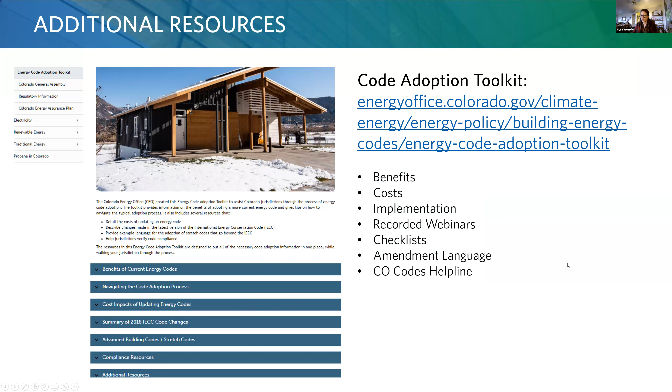Today I want to highlight the Code Helpline. This helpline is available to anyone in Colorado on any of the I-codes or REACH codes. So for example, if you are a jurisdiction and need assistance on a plan review, or a homeowner or engineer with a question about code applicability, you can submit a ticket and a subject matter expert will get back to you in a couple days. You can access this helpline through the Code Adoption Toolkit or through this link.

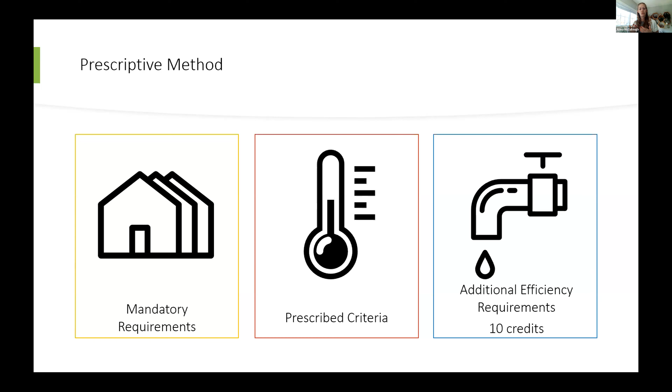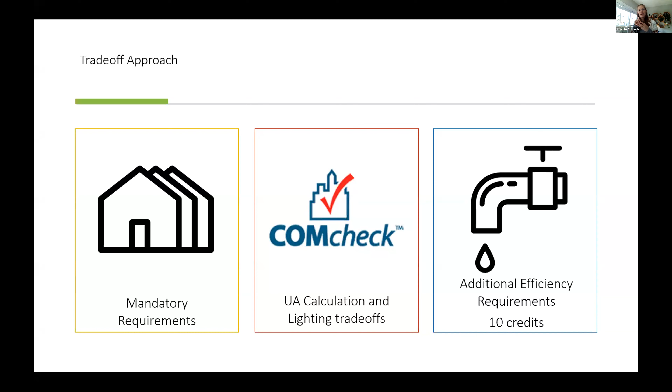If we think more about the trade-off approach, which is what we have in COMcheck, it allows for some trading off within the envelope or the lighting so there's a little bit more design flexibility. When reviewing for a trade-off approach, which is what we see most often, we're looking for a ComCheck on envelope, lighting, and then mechanical and plumbing all in one ComCheck. We expect to see that they all have that green passes bar.

Within COMcheck, the program is calculating the total UA of the building, which is the sum of the U factor of all of the assemblies - the glazing, the roof, the walls, the foundation, any floors above grade - multiplied by their assembly areas. If each of those is less than or equal to zero, it will pass the ComCheck.

So you'll see in some buildings that the prescriptive level of insulation provided in one small area of the walls might not meet the prescriptive insulation listed in the code. The way the design team is getting away with that is by using the trade-off approach calculation that ComCheck does for them. Within lighting as well, we're looking for the total lighting power used in the building to be less than the lighting power used in the baseline prescribed by the code. So ComCheck also allows for some trade-off between lighting power densities in spaces.

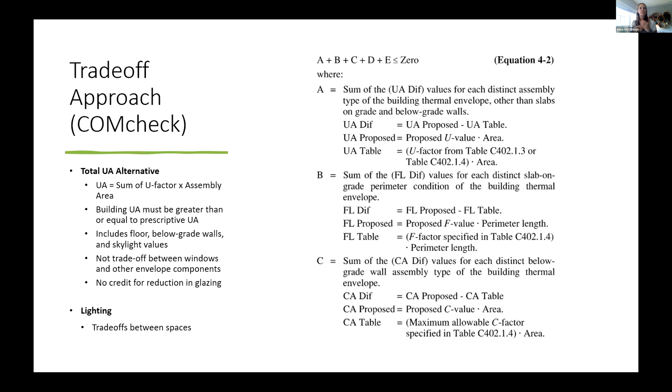Along with those mandatory requirements, in ComCheck we're also looking for the additional efficiency package. In the 2018 IECC, we had 6 options and the design team picked one - it was almost always reduced lighting power density - and selected that in ComCheck. You wanted to make sure ComCheck reflected the same efficiency package across all 3 ComChecks, so your architect, your lighting designer, and your HVAC plumbing designer were all selecting the same efficiency package. And we just moved on, right? Things got a little bit more difficult in the 2021 IECC.

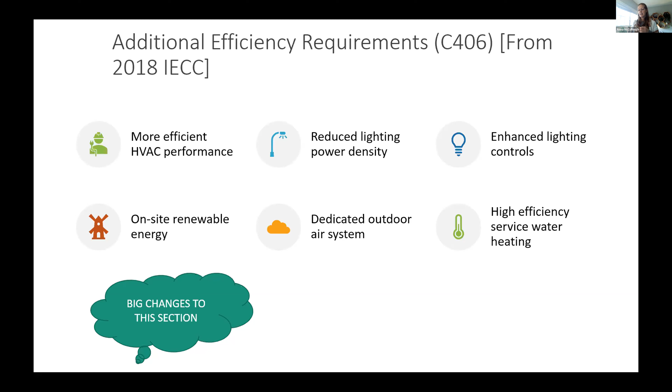In the 2021 IECC, we now have to show 10 credits under Section C406. What that means is there's essentially a menu of options that design teams can mix and match based on their occupancy type in the building to come up with 10 credits.

I also wanted to point out that if we have a tenant space, they only have to receive a minimum of 5 credits from these tables. There are some exceptions based on the base compliance of the total building when it complied with code. If they have the reduced air infiltration, C406.9 for example, your tenant that you're reviewing is not going to need to show 5 credits - they're already compliant with the additional efficiency requirements.

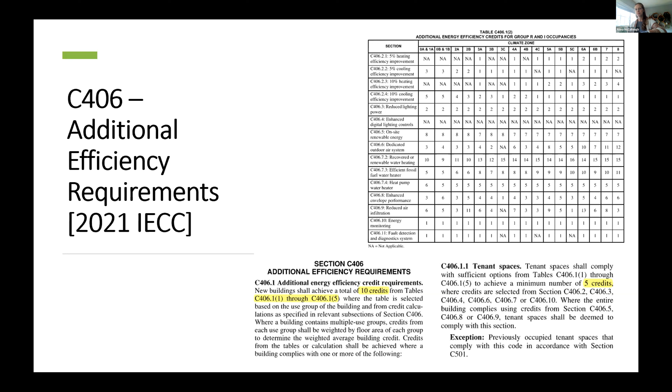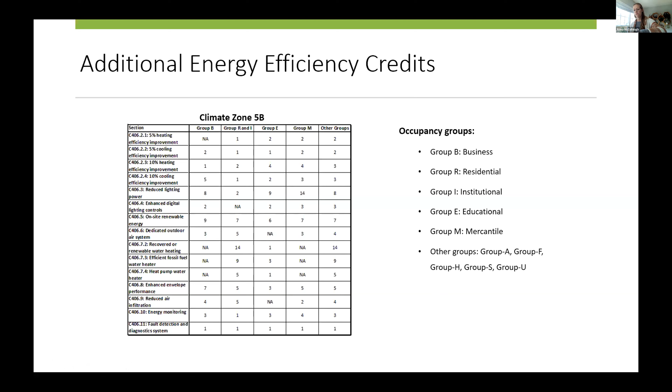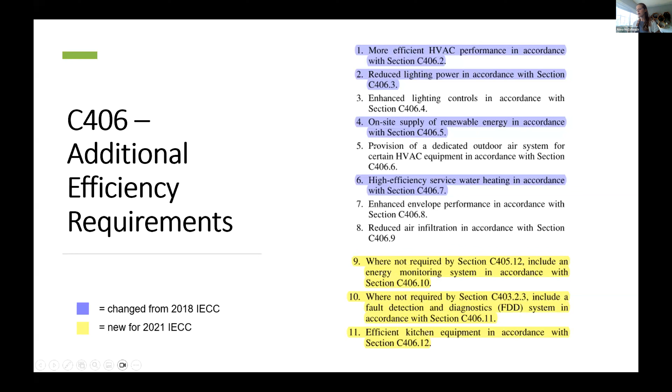There have been, like I said, some changes from the 2018 to the 2021 IECC. We've highlighted in purple each section that has had updates from the 2018 IECC to the 2021, and we have 3 additional efficiency options that are new for the 2021 IECC. We'll go quickly through these just to give you guys an idea of the efficiency packages that we're expecting to review for, and where the efficiency is going to come from in the performance model pathway.

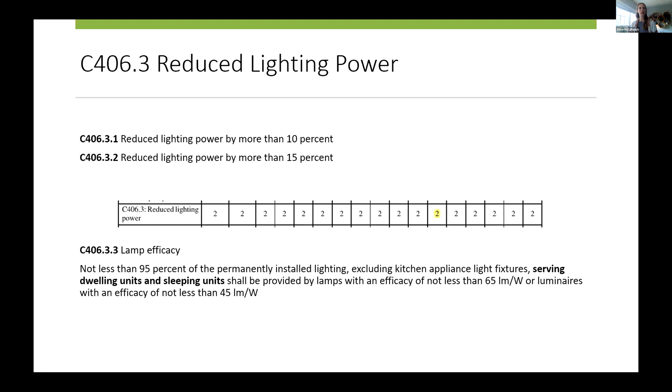The first energy efficiency package is reduced lighting power. Low points available on this one because it's easy to meet, and we want to encourage design teams to do more than just reduce their lighting power. We have quite a few points available for on-site renewable energy. The code sets a standard for the amount of on-site renewable energy required to receive these points, and there are increased credits based on the amount of PV provided - there's a calculation that will give them the number of credits.

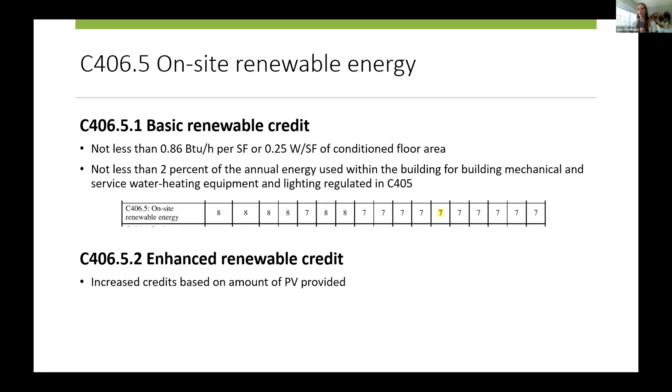Service water heating.

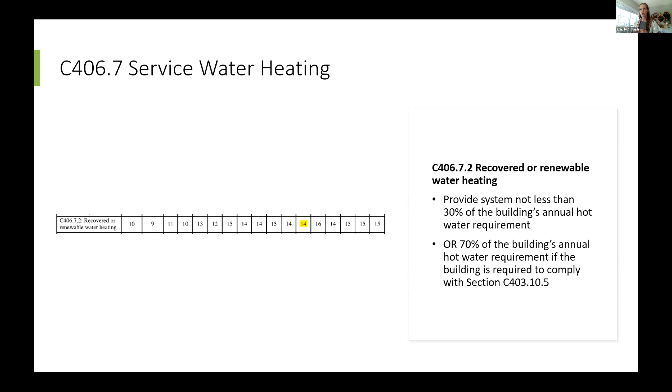In section C406.7, the first credit option is recovered or renewable water heating. This is really hard to achieve. What's required is providing a renewable water heating system that is not less than 30% of the building's domestic hot water use, or 70% of the building's annual hot water requirement if the building is required to comply with another section. This is really hard to achieve - it's going to be heat recovery from wastewater, or solar water heating on the roof. Very high first cost, weighted very heavily.

If we provide a condensing water heater, points are available. This is for climate zone 5B. Heat pump water heaters are weighted slightly less.

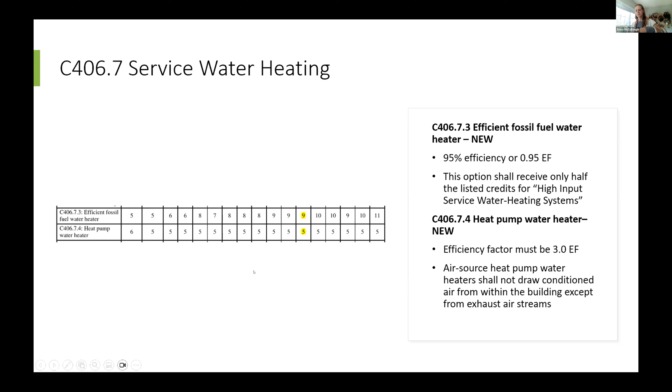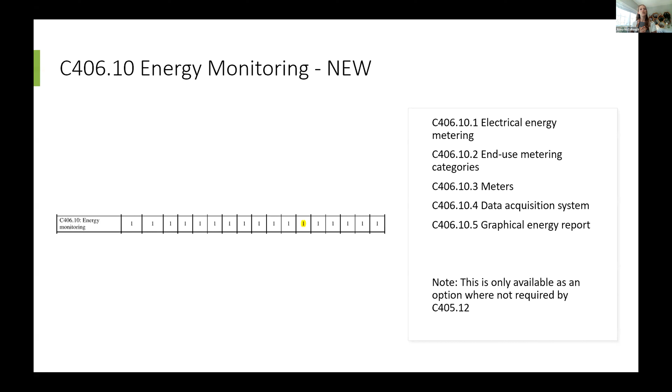Energy monitoring: if the building is not required to have energy monitoring and energy monitoring is provided, 1 point is available. There are requirements around what that energy monitoring system has to provide. These requirements are all listed within section C406, and they match the requirements in section C405.12, where energy monitoring is required.

Fault detection and diagnostics is a new credit available. If you are providing a fault detection and diagnostic system on your HVAC system and it is supplied above what is required - supplied when it's not already required by code - sorry, there's a double negative in there - then you could receive 1 point for that. There are requirements around what that fault detection and diagnostic system has to do to receive this credit.

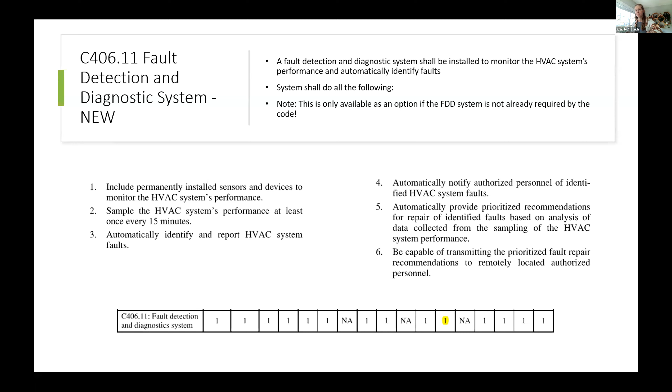I know I kind of blew through the prescriptive and ComCheck approach, but I really wanted to talk a little bit about what energy efficiency measures are required in the proposed, so we can talk more about why the performance method is the way that it is. Any questions on the prescriptive or ComCheck method so far?

Feel free to interrupt me if you have a question, or if you want me to go back and talk a little bit more about something - I'm happy to do that.

So when we're talking about the performance method, there was a change between 2018 and 2021. In the 2018 IECC, you were only required to have 15% annual energy cost savings. In the 2021 IECC, we have to have 20% annual energy cost savings. We'll talk more about what that means and what we're comparing against, but just to give you an idea, we are requiring an additional level of energy efficiency with the 2021 IECC.

These buildings are still required to comply with all of the mandatory requirements in the code - things like fault detection and diagnostics on outdoor air economizers, lighting controls, things like air barriers. I could go on. There is a whole chart in section C407 of the 2021 IECC that gives you a full picture of each mandatory requirement and where it is in the code. It's a very useful chart.

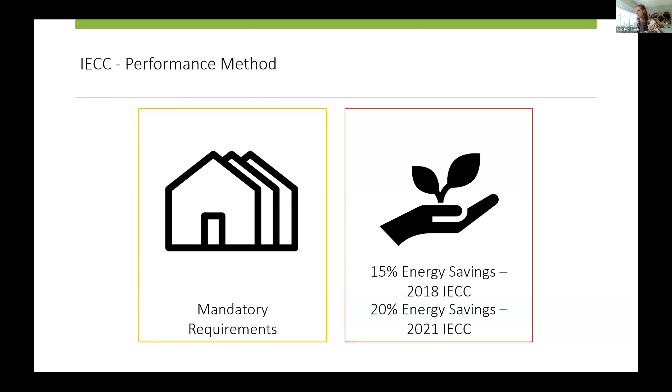So what all is required in section C407? Again, only those mandatory requirements are required - prescriptive requirements do not need to be met. There is required to be a whole building annual hourly energy model. We're not just looking at loads, not looking at an output from an HVAC engineer's load sizing program. We are looking for a whole building annual hourly energy model, which means the program the energy modeler uses has an hourly weather file that models the energy use of the building for every hour of the year based on its location.

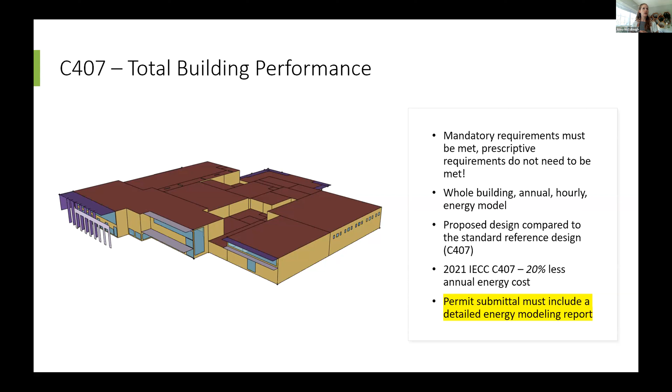The proposed design is going to be compared to the standard reference design. We'll talk more about what the standard reference design is, but that's what we're going to call the baseline. Again, in the 2021 IECC, we have to show 20% less annual energy costs than the standard reference design. Our permit submittal must include a detailed energy modeling report. We'll go through an example of what one looks like, at least from my company.

So when do we see buildings using this method? Number one, if they are very large, typically they're using the performance method. We're seeing more and more clients come to us looking for an energy model solely because ComCheck and Section C406 have become much harder to show compliance with.

If their glazing area, or window to wall ratio, is greater than 40%, they have to comply via Section C407. Prescriptively in the code, you cannot have a window to wall ratio greater than 40% if you are using daylighting controls. And if you are not providing daylighting controls, you cannot have a window to wall ratio greater than 30%. So that's really important when we're reviewing, to make sure their window to wall ratio has been reflected accurately in their ComCheck. If you look at the drawings and it's a building that looks like this, we'd be a little suspect if they said their window to wall ratio is 40%.

Other times we see design teams want to use Section C407. They're looking to trade off between their envelope efficiency and lighting and HVAC efficiency. A good example would be a metal framed building that doesn't want to provide continuous insulation. We can probably model them out of providing continuous insulation — we would never recommend that — but it is a way to get out of providing some of the things prescribed in the code.

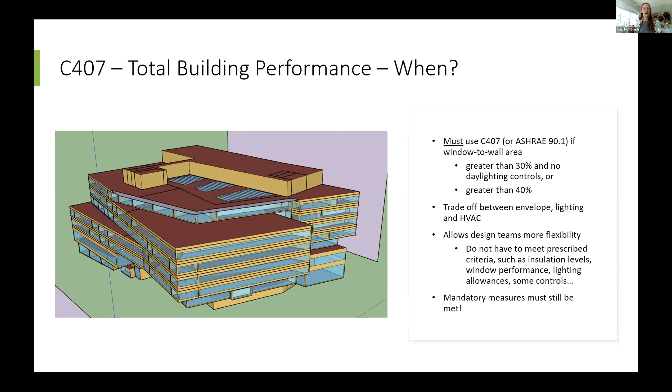And this is a common theme across all of my slides: the mandatory measures must still be met. If it's mandatory in the code, you still have to show compliance with it. When we're reviewing for that, we want to see a full list of those mandatory measures and where they are located in the drawings. You guys don't need to come up with a list of the mandatory measures.

So, any questions so far on when we would use Section C407, or what we're reviewing for when we first look for that compliance?

Great, okay, so additional compliance requirements. Utility rates have to be identical between the standard reference design, or the baseline, and the proposed. They can be from the Department of Energy, the EIA, or local utility rates. The code does not dictate which utility rates you have to use — you just have to use the same ones.

Oftentimes, when we're looking at outputs from the energy model, we don't see that utility rates per kilowatt hour are completely identical. The reason for that is you're looking at a blended rate — the cost per kW combined with the peak energy use cost combined with the kilowatt hour energy use cost creates what's called a blended rate. So there'll be a couple cents difference between the baseline and proposed, but we want to make sure we're using the same utility rate structure.

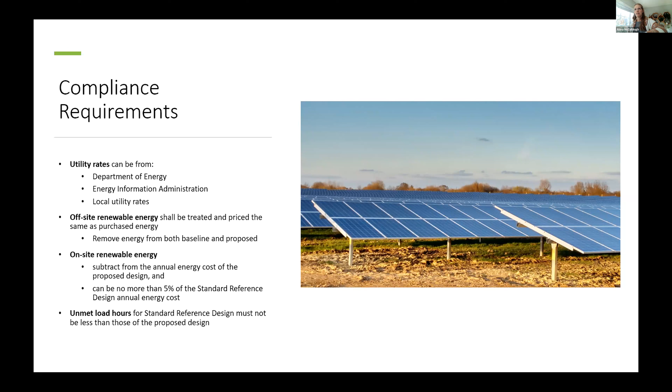Any questions on any of that? Great, my mouse is frozen.

Okay, so here's an example of a building performance letter that we submitted for. This is probably a 2021 example. I have the different sections highlighted in here. The mandatory provisions are shown in the red box. This is on a drawing sheet. Some jurisdictions like to see the compliance on a drawing sheet, some like to see it as an 8.5 by 11 appendix. We do both very frequently.

If it's on the sheet, it's a lot easier to find and gets missed much less often. So we have the mandatory measures located here, very clearly, with each mandatory measure listed and where it is located in the drawings.

We also want to review the baseline and proposed inputs to the energy model. We want to make sure that the standard reference design, or the baseline, was modeled correctly per section C407 - we'll get into that in a minute - and that the proposed was modeled per the drawings. The correct HVAC system is in there, the efficiencies are modeled correctly, lighting power densities, all of that.

If you're looking at a school, for example, and the lighting power density allowed in the baseline of the classroom is 0.60 watts per square foot, but then in your proposed design they're only modeling 0.02 watts per square foot, that should set off alarm bells. That's like one light in the middle of the classroom. So we want to make sure that the inputs are within the realm of possibility and accurate to what was designed.

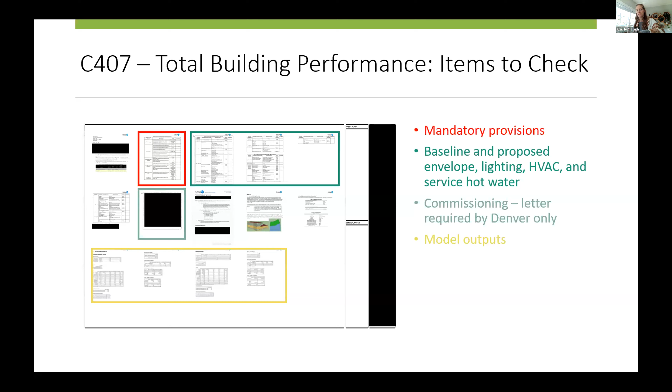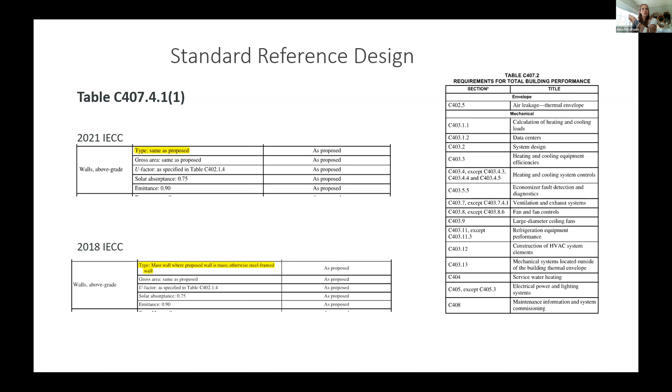The standard reference design, a little bit more about the envelope. All of the insulation and glazing meet the prescribed insulation levels and glazing U factors, as well as solar heat gain coefficient.

If you have greater than 40% window to wall ratio in your design, you can only have 40% as a maximum window to wall ratio in the standard reference design. We want to make sure they are taking a hit for providing so much glass above what is allowed to be included in the design prescriptively.

Skylights are only allowed to be 3% of the gross roof assembly in the standard reference design. And if there is shading, there is no shading modeled in the baseline.

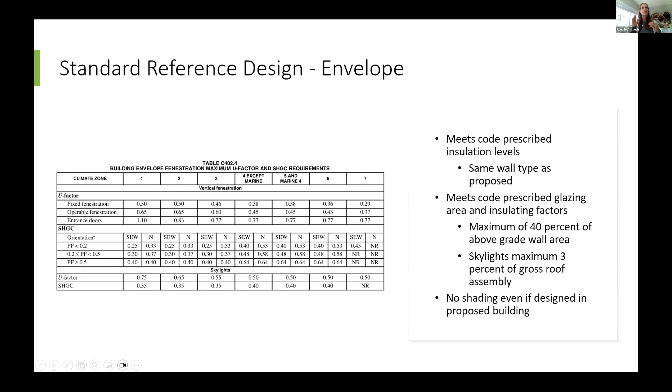Here's a good example of a window to wall ratio in the standard reference design versus the proposed. You'll see in the standard reference design that we have much less glazing shown to meet that maximum 40% window to wall ratio. And in the proposed, we're at probably closer to 60 to 70.

Sorry, my toddler is home and he broke into my office.

Much closer to a 60 to 70% window to wall ratio.

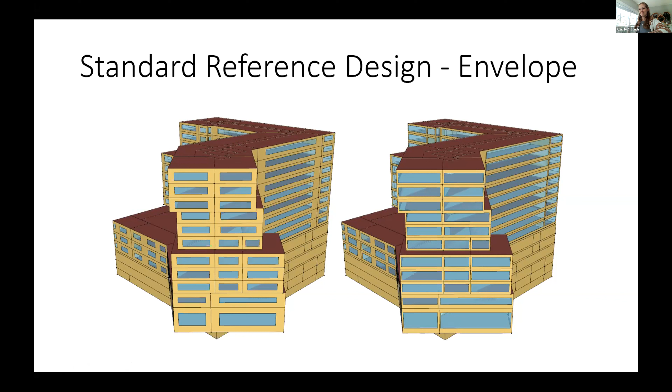In the standard reference design, we also would always expect to see code prescribed lighting levels. So all of the lighting power allowances are modeled per section C405.4.2, as well as daylighting.

Oftentimes daylighting will be required in the standard reference design, but the lighting power densities in the proposed model will be so low that daylighting doesn't need to be provided. So we want to make sure that lighting controls are called out accurately, so that daylighting and prescriptive requirements and lighting controls are modeled accurately in the standard reference design versus what may or may not be provided in the proposed based on their design.

A good note on this slide as well is that interior gains are the same between the standard reference design and the proposed. So if you're in an office, for example, you're modeling the same amount of office equipment in the baseline as the proposed.

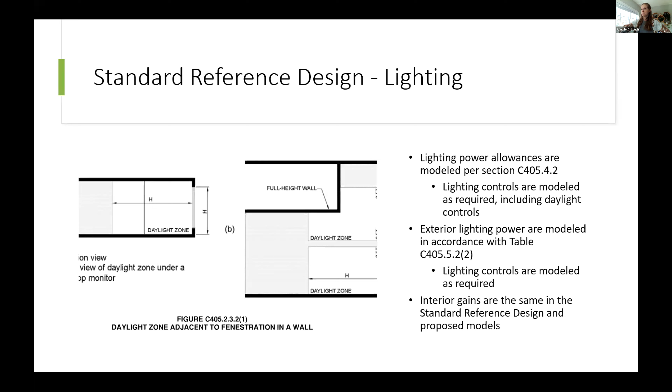Okay, so in the mechanical system, there are these two charts: C407.5.12, which is the HVAC systems map, and then C407.5.13, which is the specifications for these different system types. So your proposed system type tells you what your baseline system type will be, or your standard reference design system type.

We start off with your condenser cooling source. If you have a rooftop unit that's DX, a direct expansion rooftop unit, it's cooled by air. You're down here, where your condenser cooling source is air. Let me find my mouse, so sorry.

If we're still using our same example, a standard kind of rooftop unit with gas heat, and let's just say it's electric reheat, your heating system classification is going to be fossil fuel, right? We're an office, it's a VAV rooftop unit, so we're system 4. If we go to this chart, you'll see it's a packaged variable air volume with reheat, VAV, direct expansion cooling, and a hot water fossil fuel boiler is providing your heating.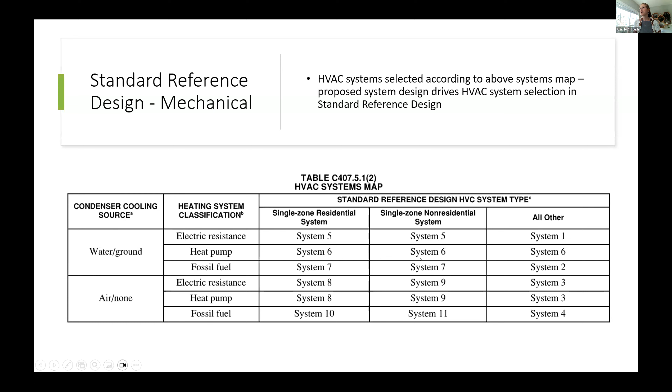So if we have a water source heat pump system, we know that our condenser is cooled via water, so we're in this upper half of the chart. And then we have a heat pump, a water source heat pump, so we know we're in this secondary system, or second row in the chart. And so then we know we're a system 6. So if we go back to this chart, you'll see that your system type is water source heat pump, constant volume, direct expansion, an electric heat pump, and then the boiler is providing the heating to the loop.

This can seem very overwhelming to try and work your way through this HVAC systems map. But for your typical system, what's going to raise a red flag for you is if the baseline system type or baseline heating system doesn't have the same fuel type as your proposed heating system. That's a good red flag for you to check.

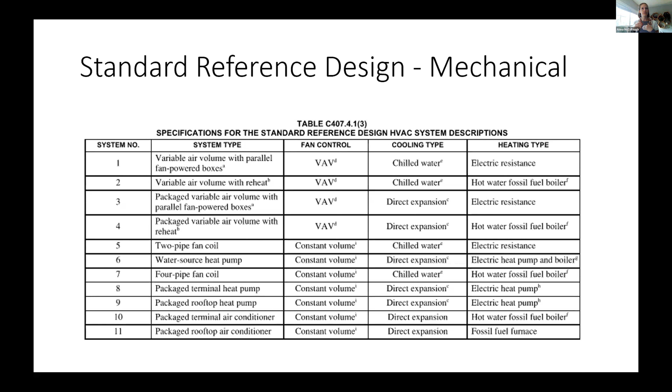The mechanical controls in the standard reference design must meet the mandatory and prescriptive requirements. A good example is that outdoor air economizers are prescriptive. If our proposed system is VRF with a DOAS, there's not going to be an outdoor air economizer unless our client has a ton of money and space for ductwork. But we could go through the HVAC systems map and find that our standard reference design system would be a VAV with parallel fan powered boxes, and in that case it would be required to have an economizer. So we want to make sure those prescriptive requirements are being modeled, and your energy modeler isn't taking credit or showing annual energy cost savings for something they shouldn't. Outdoor airflow, as a side note, has to be modeled identically between the baseline and proposed, so we want the same amount of outdoor air in the baseline as the proposed.

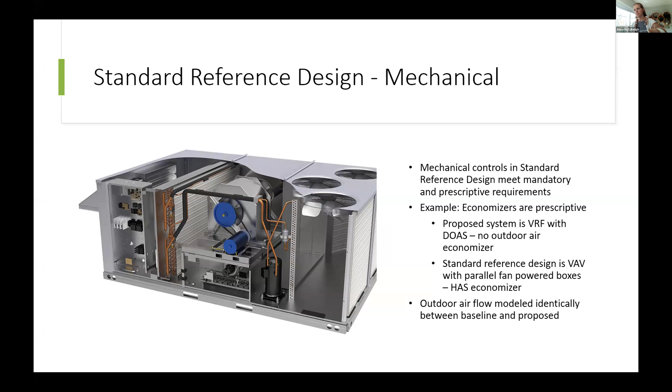Okay, that was a lot of information. Do you guys have any questions before we very quickly go over ASHRAE 90.1 2019 as our secondary compliance path?

What would be the best path for large additions that require existing building retrofits? It really depends. Typically what we see is that, I am an energy modeler so I see more energy models than anything else, and very frequently with existing buildings we will see an energy model. If you're taking, for example, an unconditioned space to a conditioned space, that's when the prescriptive option might be easier to comply with. But if you're modeling a large addition with a small amount of retrofit, I would recommend the performance pathway.

Another question: hunting cabins and similar buildings that are non-conditioned or low energy—what would modeling a building with limited winter or seasonal heating-only use look like? Heating temperatures are kept at a minimum, and building operation is for only a season instead of a full calendar year. So in this case, we would expect to see no cooling, obviously.

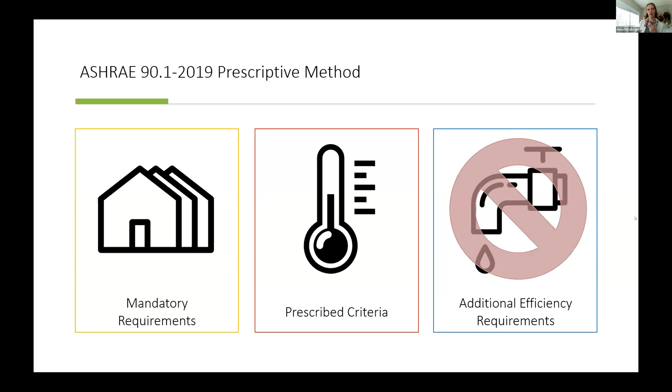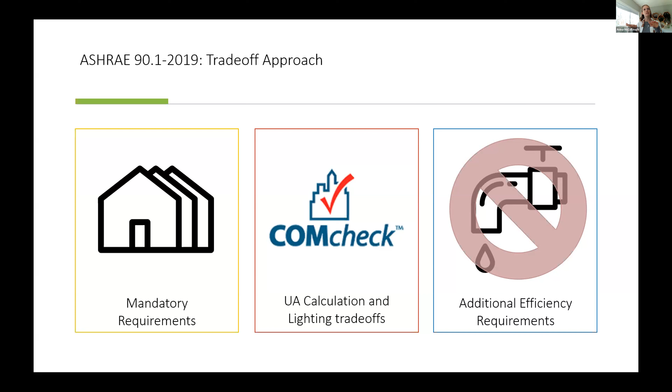You can still use COMcheck for this. You can do that same UA trade-off, the lighting trade-offs, but they should have ASHRAE 90.1 2019 selected as their code. There are no additional energy efficiency requirements, no packages from Section C406 that we're used to seeing. The reason is that ASHRAE typically has more mandatory measures than the IECC, and they typically have slightly higher energy efficiency than we see in the IECC, so they don't include the additional efficiency packages that IECC does to try to level the playing field between the two codes.

Compliance paths, I guess I should say.

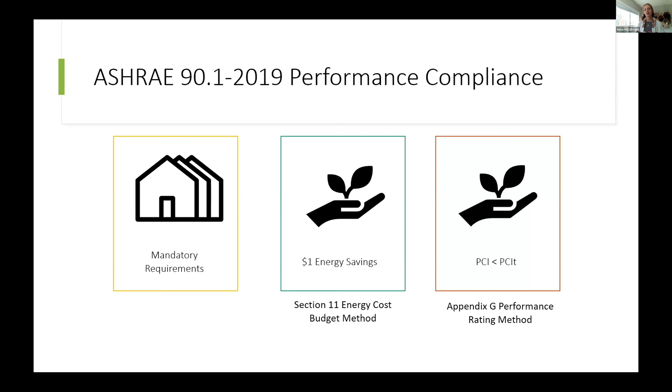Another big difference between ASHRAE 90.1 2019 and the IECC is that ASHRAE 90.1 has two compliance pathways. The first is Section 11, and the second is Appendix G. Appendix G has to be selected or listed as a compliance pathway for your jurisdiction. If it is not listed, all performance compliance for ASHRAE 90.1 2019 must be through Section 11. Section 11 only requires you to show $1 in energy savings as compared to the standard reference design.

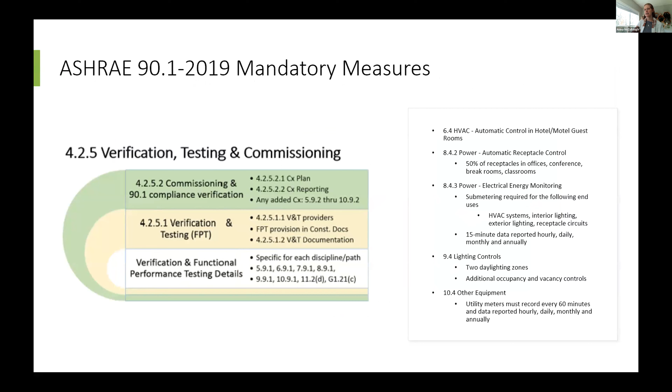Here's a list of mandatory measures in ASHRAE 90.1 2019 that are slightly different than the IECC. We're not going to go through them for the sake of time. Then we're going to talk really quickly about Section 11 and Appendix G, the differences between those, and red flags we should look for in our reviews.

Section 11 is very similar to Section C407. The 5% contribution from on-site renewables, the HVAC system types, the prescriptive levels of insulation - all of that is identical between Section 11 and Section C407. They obviously have to be referencing ASHRAE 90.1, not IECC, for the insulation and glazing, but the methodology of modeling is identical.

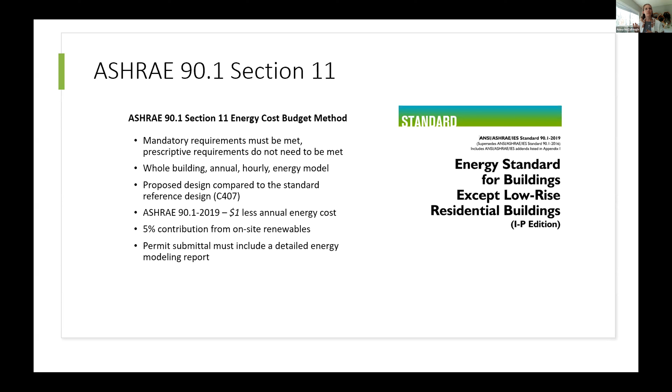We start running into a lot of differences when we start talking about Appendix G. You have to show that the performance cost index, which is a whole calculation in and of itself, is less than the performance cost index target, which is also a calculation in and of itself. So if your design team said, here's our compliance documentation, we're complying with Appendix G, you're not looking for annual energy cost - you're looking for what is your PCIT and what is your PCI. Other than that, the idea is the same.

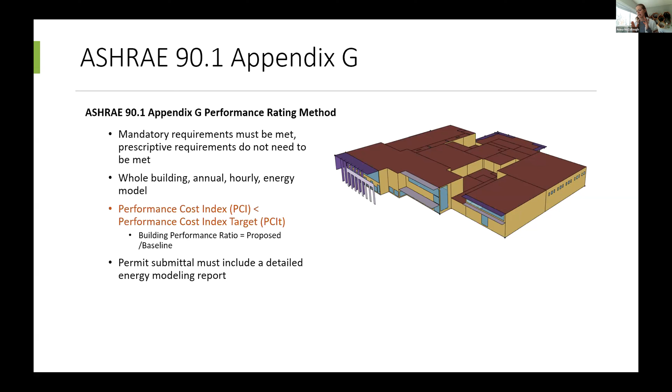Another big difference in Appendix G is that they now have what is called a stable baseline. We are actually comparing a new construction, our design, against a 2004 building. So if we take our design and make it comply with ASHRAE 90.1 2004 in terms of lighting power densities, prescriptive compliance, prescriptive insulation levels, prescriptive glazing, we're comparing our design against that.

Appendix G has what are called building performance factors that are included in the calculation of your target. So your baseline no longer will change from code cycle to code cycle, but how you calculate your target will, and it will become more and more difficult to meet that target, requiring more and more energy savings.

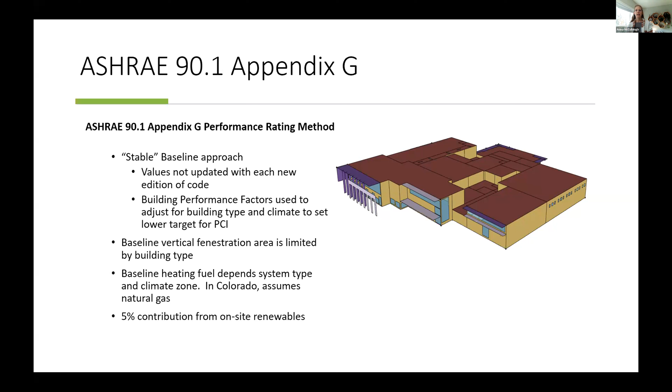The other big difference in Appendix G, and why I want to bring this up, is that we are modeling in Climate Zone 5B, all of the baseline heating, domestic hot water heating, will be natural gas, no matter what. It makes it very difficult to meet this pathway if you have any sort of electric heating in the building. So we want to make sure if they are complying with Appendix G in ASHRAE 90.1, and you're looking at the outputs from their energy model, all of their heating should be natural gas. All of their domestic water heating should be natural gas, whether or not they have electric heating in the building. There is the same note about 5% contribution from on-site renewables, but yeah.

Okay, and that was what I had for you.